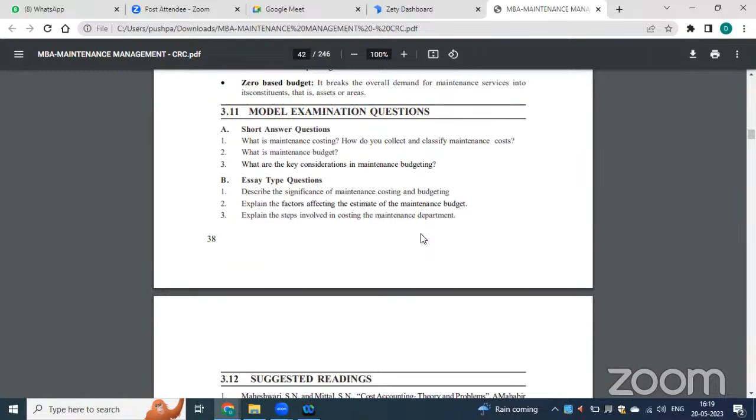Because in tough competition, if there is a delay in production, it definitely affects the cost of production, and companies cannot take the risk of losses. So they have always ensured that they go with planned maintenance, and have seen that corrective action has to be taken on an appropriate basis.

And it's not only corrective action, they always have to design the proactive scenarios. They have to understand the proactive scenarios, and ensure that there is no interruption in the production workflow.

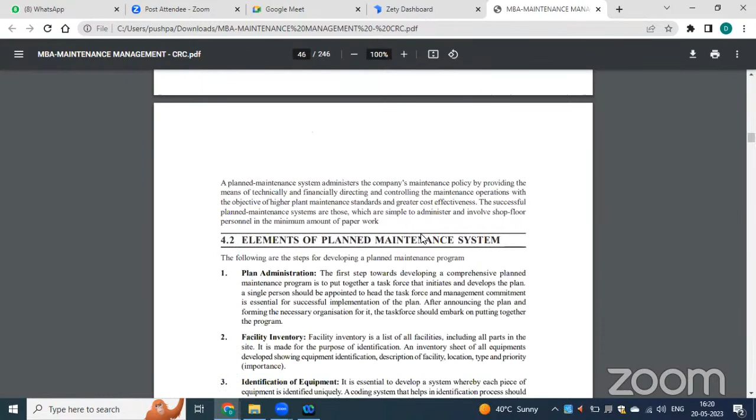So that's what we discussed in the last classes. We have seen the budget, and the estimate of the maintenance budget, wherein the estimate is based on the size of the asset.

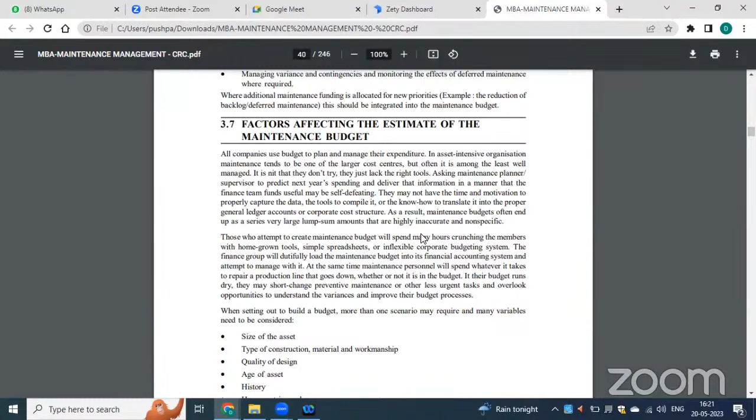Then there's the construction of the material, the quality of the design they are enrolling, the age of the asset, the history of the machinery, whether it is very obsolescent machinery or modern, modernized, automated technology, and how often it has to be investigated or maintained. All these factors are important for estimating the maintenance budget.

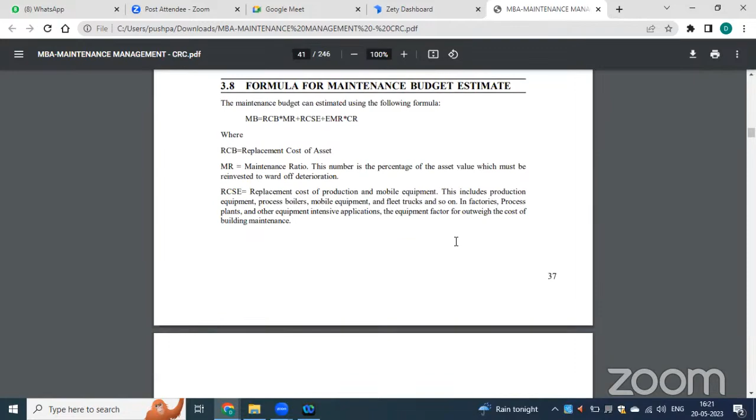So let us today talk about planned maintenance management system and control. We have seen till now the importance of maintenance management, the different costs involved in maintenance management, the role and responsibilities of a maintenance manager, and the importance of the maintenance management department. After knowing that, we will ensure how it works in the organization, how they design their activities from start to end.

So planned maintenance - how they have been planning these activities, and what are the different types of documents they prepare whenever they are planning this maintenance.

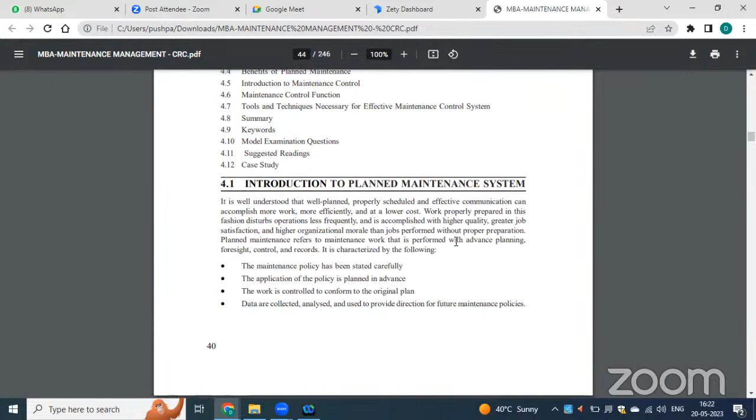It is always necessary, whenever we want to do appropriate tasks in a smoother way, that we go for a well-planned structure. When we are very clear and have a plan, we can execute it smoothly. It is well understood that well-planned, properly scheduled, and effective communication can accomplish more work more efficiently.

And at a lower cost, because we know what we are going to do and we can try to reduce the wastage whenever we have a pre-plan.

So the maintenance policy - what are the activities we try to understand in the plan? The maintenance policy has been stated carefully. We are establishing some policies, procedures, and goals of management. Whenever we are framing our maintenance management department, we have to ensure how the policy has been stated, and based on that we will plan.

So for every machinery or for every department, we have a policy. Whenever we ensure that there is a policy, it is necessary that we understand it carefully.

This should be stated very clearly. So what is the first characteristic? The maintenance policy has been stated carefully, and the application of the policy is planned in advance. This policy has to be clearly analyzed. Based on the environment we are working in, we generally state the policies, and the application of the policy is planned in advance.

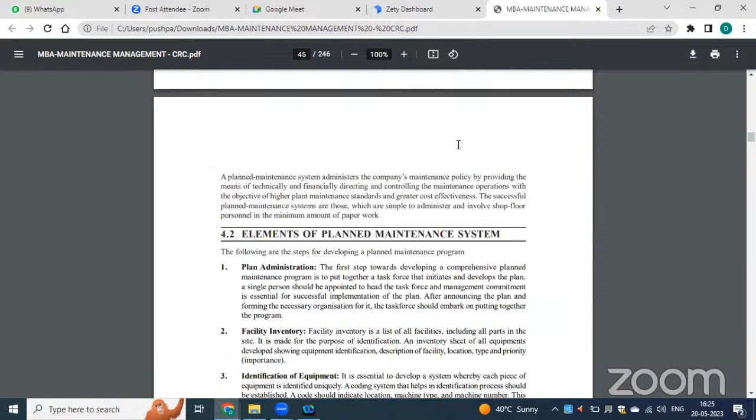A planned maintenance system administers the company's maintenance policy by providing the means of technically and financially directing and controlling the maintenance operations.

So here, what is planning? Who will do this? The administration department. This helps us administer the operations in a smoother way.

What are the elements of a planned maintenance system? The first element is plan administration. The first step towards developing a comprehensive planned maintenance program is to put together the task force. Who is required for planned maintenance? First of all, we require personnel - a task force, a group of people who initiate this maintenance program and develop the plan.

In this task force, a single person should be appointed to head it, and management commitment is essential for successful implementation of the plan. They may comprise people from each department, or specially appointed personnel with experience in different functions. Whoever is appointed should have managerial commitment for successful implementation of the plan. After announcing the plan, they have to ensure the task force embarks on putting together the program.

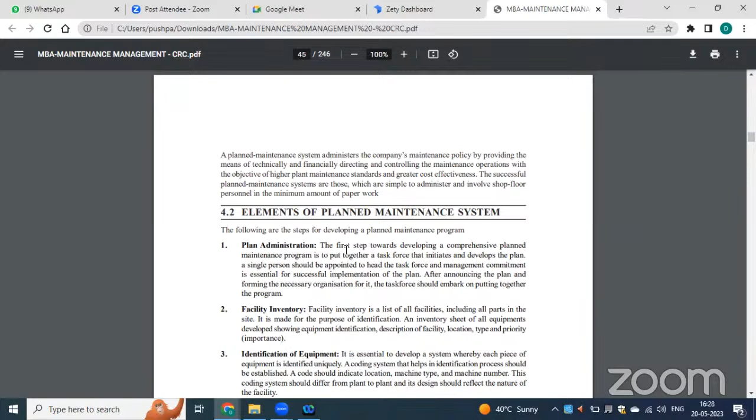Then identification of the equipment. Not every equipment needs continuous maintenance. We have to identify the equipment that is used more frequently, on a continuous basis - these require more focus on maintenance.

Machines that are not routinely maintained should be checked every 15 days or every month, to ensure there is no downtime for that particular machine. This involves identification of the equipment, where it is located, what role it plays, and how many spare parts are required for its maintenance. In this way, they collect the data.

For all this, they maintain a code. A coding system helps in the identification process and should be established. Whenever they maintain documentation, they provide a unique code for every equipment so that it can be easily identified.

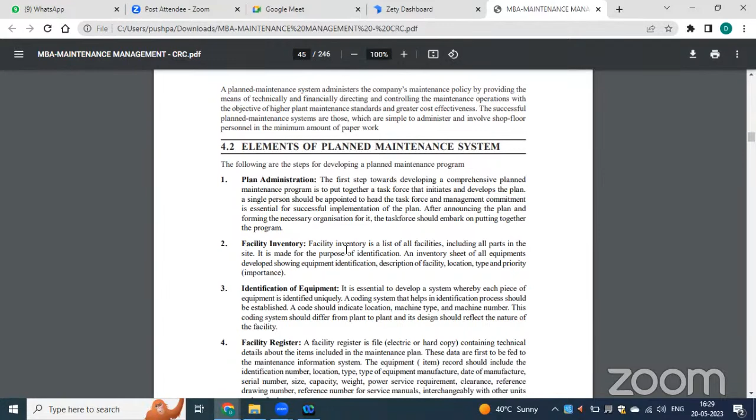Then they maintain a facility register. Every document has to be maintained in the form of books. A facility register may be in electronic form or printed form, nowadays, based on organizational policies, containing technical details of the items including the maintenance plan.

So they will have all the information where, whenever any external person goes and sees the register, they will come to know the inventory, the spare parts, or the way operations have to be organized or conducted.

The facility register gives information regarding the location of the equipment, the type of equipment, the manufacturer, the date of manufacture, serial number, size of the machinery, weight, capacity, and power service requirements, since every machinery has different power requirements - some 20 watts, some 100 watts, some 1,000 watts. Based on the requirement, they maintain this in the facility register.

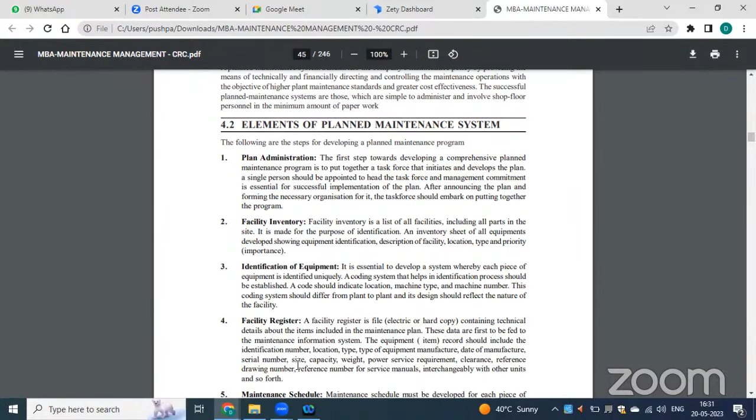Then the maintenance schedule - as we said, we have to plan for the program. For this, we organize a scheduler, and based on the schedule of each piece of equipment, the tasks are performed. The schedule will include the name, identification number of the equipment, the location reference number, and a detailed list of tasks to be carried out.

For every equipment, we see whether there is an inspection, preventive maintenance, or a replacement to be done, and specify the list of tasks to be carried out. Then the frequency of each task, at what intervals the tasks have to be carried out, and the trades required to carry out each task.

Sometimes the machinery is at different places, so what other requirements are needed to continue the task - the time for each task, special tools required, materials needed, and details of any contract maintenance arrangement. These are all included in the maintenance schedule.

Then job specification, wherein we see the procedure to be followed in every maintenance. Job specification will include the identification and number of the item, the location of the item, the maintenance schedule reference, the job specification reference number, the frequency of the job, and the reference drawings, manuals, and safety procedures to be followed.

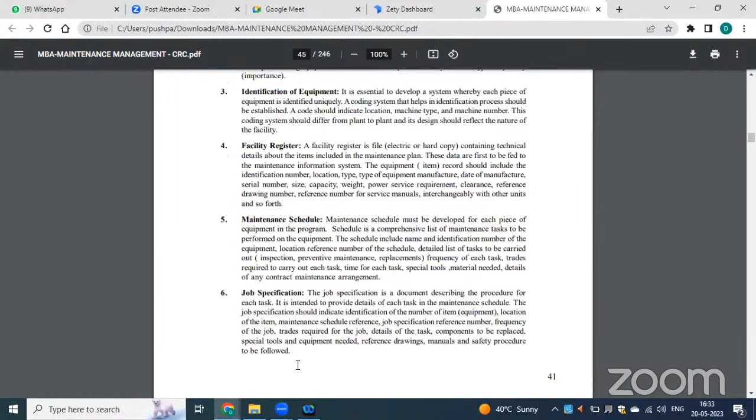So we have seen the planning activities so far. First, they identify and administer the activities. Then they list out the required inventory. Then they identify the equipment. After identifying the equipment, it is also necessary to maintain a facility register, design the maintenance schedule, and prepare the job specification.

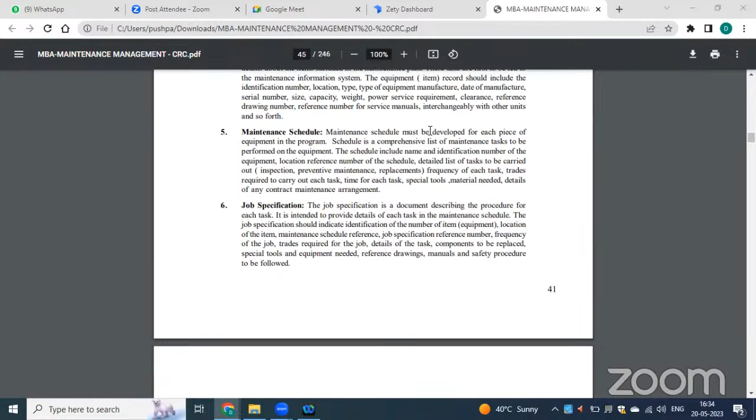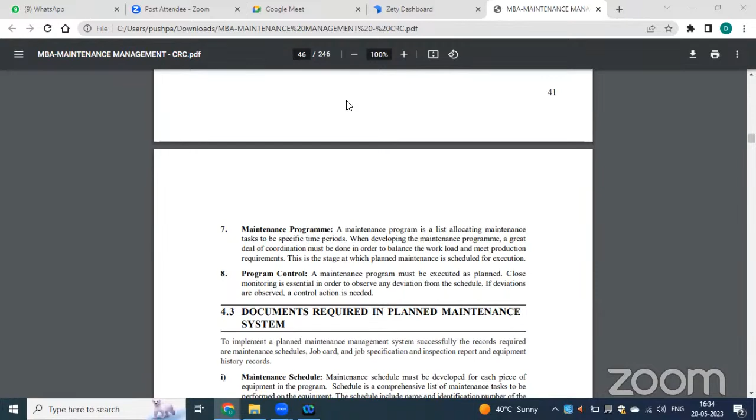Then how is the maintenance program planned for? It's a list allocating maintenance tasks tied to specific time periods. Then program control: we try to see how the plan is being executed, and through monitoring we check whether any deviations have occurred from the schedule. If any deviations occur, we go with the action plan that is needed.

Then what are the different types of requirements and documents that are required?

These are important questions that can be asked in your examination, because it shows how organizations practically do these activities. We should be very familiar with what type of books they maintain, and how they administer the plans and the activities.

Let us go through the list of documents required in the planned maintenance system. First, the maintenance schedule, which tells us the list of activities scheduled for each equipment in the program.

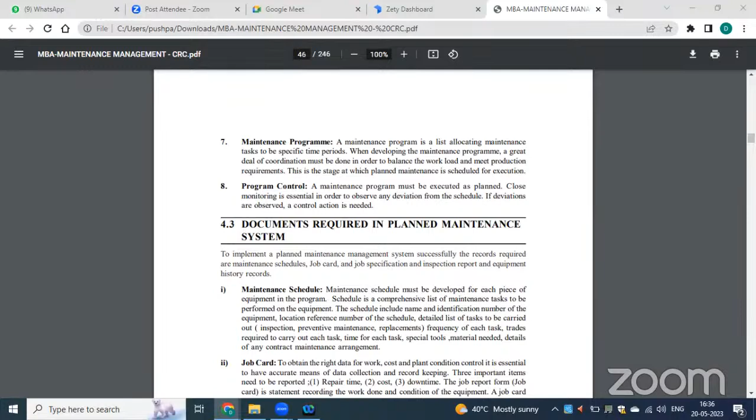Then we have the job card. What is a job card? It gives us the right data of work, providing an accurate means of data collection and record keeping. What is included in the job card? The repair time, meaning how much time is involved in the repairing, the cost involved, and the downtime.

What do you mean by downtime? It's the machinery breakdown time, how much time the machinery is not being utilized. That is considered downtime. Then the job report or statement records the work done and the condition of the equipment, showing how much work was done by that machinery and its current condition. These are all the items included in the job card.

A job card can be issued to each employee participating in a job. It can be a manual job card or an automated one. Most of the information required is to be extracted from the work order.

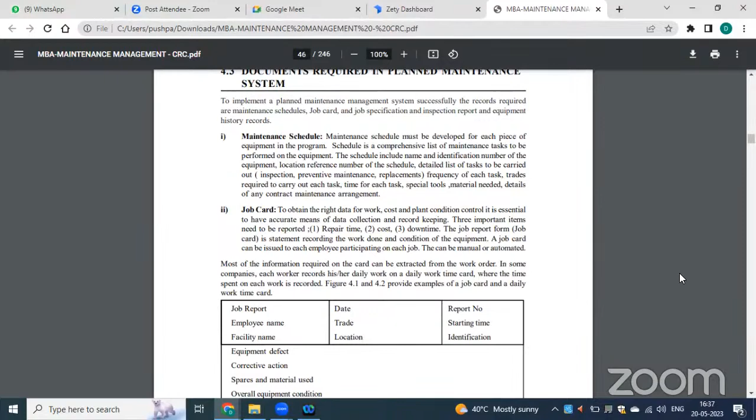We will have a format job report with the employee name, whoever is allocated for that job, the facility name—the department or floor level assigned—the date, the trade, the location of the equipment, the report number, and the starting time identification.

Then what type of activities are they doing on a continuous basis? Is it an equipment defect? Is it corrective action done this time? Have spares and materials been replaced? Is it the overall equipment condition, or remarks and time taken?

So this will be the format of any job card, which gives us complete information on what type of jobs they have been involved in.

Then we have the job specification. As I mentioned, job specification involves information regarding the inspection and tools used for that particular job, and how the maintenance activities have to be undertaken, so as to meet a required standard. Therefore it is necessary that all conditions be clearly mentioned so appropriate action can be taken.

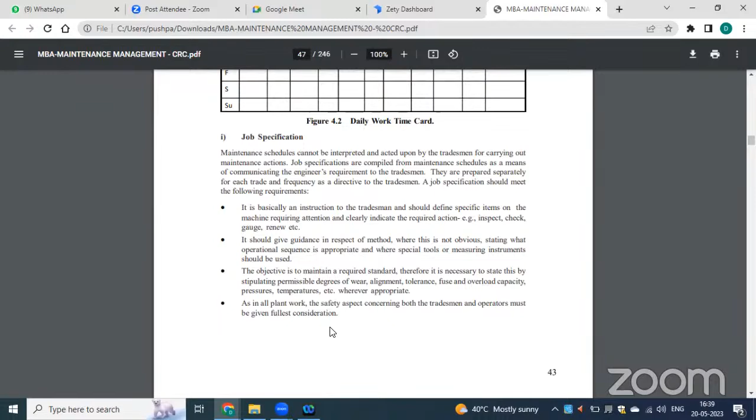The job specification includes the plant description, where the equipment is located, the week number on which they worked, the plant number, the maintenance code, special tools if required for doing the job, the operation number, and reports of other defects noticed during inspection. This is how the specific job specification format will be.

Right, so here, the first letter determines the trade: M is mechanical, E is electrical, C is civil. So they will try to code it. The specification numbers will be like M123, that is mechanical department, job number 123. Electrical department 125. In this way, they will try to give the codes based on the first letter of the denoting trade.

And weekly - meaning, is the maintenance department looking after this on a weekly basis, monthly basis, quarterly basis, or annual basis? So weekly means W, monthly means M, 3 monthly means 3M, that is quarterly, and A is annually.

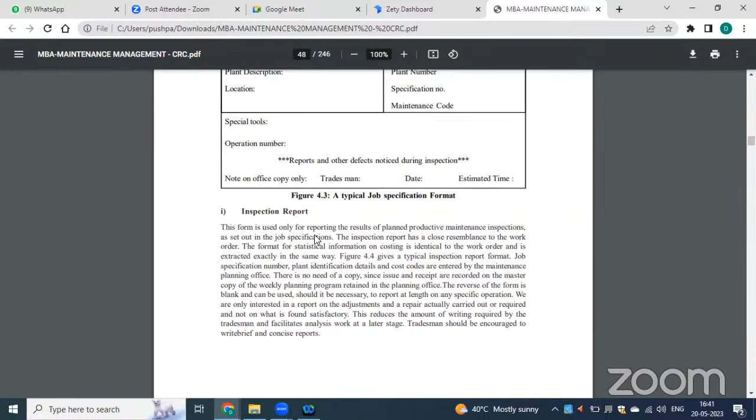So it's like an inspection report - a form used only for reporting the results of planned productive maintenance inspections as set out in the job specifications. Here we will have the operation number, the item, the date, time on, time off, total hours, hours in minutes. So in this way, they will try to maintain a typical inspection report format for all the planned activities.

Then equipment history records. As we have seen, history is very important - how many years the machinery is, how old the machinery is, what requirements it has, how many spare parts the machinery uses, how often the machinery is on, how often breakdown is affecting the production process. So everything will be recorded.

So equipment history records consist of equipment description and location, the inspections, repair, servicing, then work done on equipment, measurement of reading taken, failure time, and the time lost to carry out repairs.

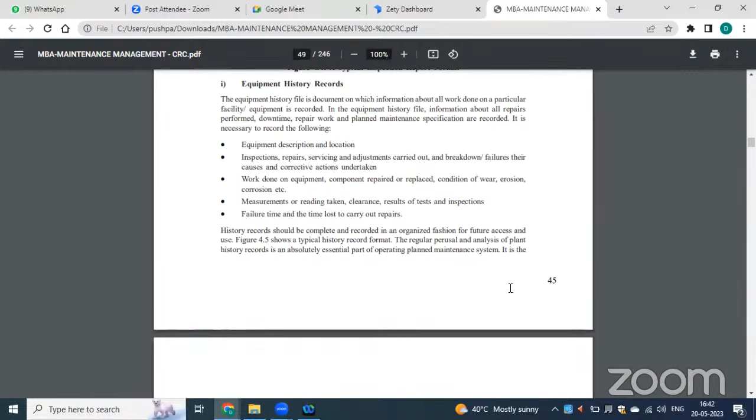So see what is the cause, what is the repair done, what was the downtime, what was the repair time. This will give us information that, okay, what machines will take a long hours of repairing time, what machines will take less hours of repairing time, what machines are having more breakdown time.

So based on that, we can plan our activities. This history provides a base showing on what continuous basis the machines are being maintained, or what the condition of the maintenance is. Based on that, we can take corrective actions, or we can take preventive actions. So the mechanical history record gives us an idea of the overall picture of the machinery, and based on that we can plan activities.

Benefits of planned maintenance - what is the benefit? Definitely, whenever everything is planned, we can reduce the risks, so there's a reduction in emergency maintenance. Whenever we know there may be a breakdown and we have taken corrective action, then there will be no breakdown. So we can reduce the number of breakdowns whenever we are planning pre-maintenance activities.

Reduction in downtime - when we have everything in action or arranged, we have spare parts managed, we know there may be a downtime, we know if the machinery breaks down we have to get the tools and equipment ready, we know the location of the machinery and its importance. All these factors will definitely reduce the downtime of the machinery when we go for pre-planned activities.

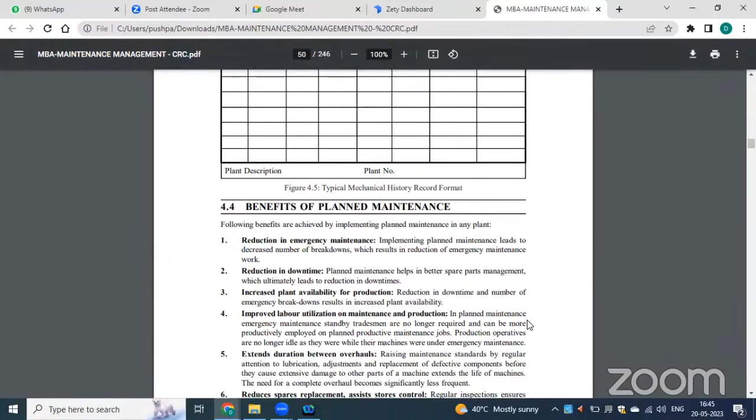Reduced spare parts replacement assists stores control. Regular inspections will try to ensure that spare parts are not being replaced or going on with excessive damage, and early inspections give a warning of impending component failure.

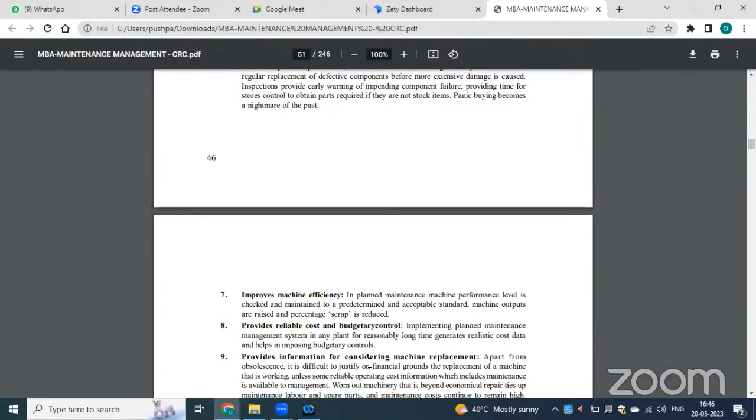Improved machine efficiency, wherein the performance level is checked and maintained to a predetermined and acceptable standard. This also provides information for considering machine replacement.

Whenever we go with the track record of any machinery, or with the data, we can understand the obsolescence involved in that particular machinery, and relate it with the financial grounds. We try to see whether the machinery has to go with buyback, or what policy has to be designed for that particular category of machines.

So this is how the activities are planned in the maintenance department.

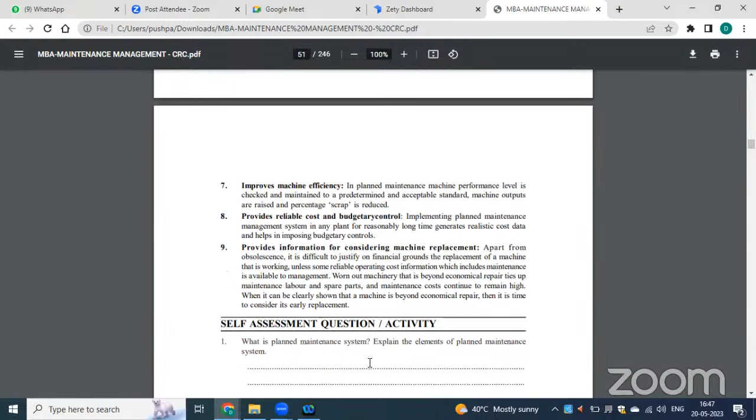So what is control? The deviations that occur from the original plan. Whenever we are planning, and based on that whenever the original actions have been undertaken, we'll try to see how much deviation there is, and based on that we'll try to go with maintenance control.

So variations in maintenance demand - whatever the input, whatever the output, whatever the objectives, and based on whatever the facilities, labor, equipment, space - how we have planned it, scheduled it, executed it, what type of machines and equipment were involved, how the performance of the machinery has been improved, and how the availability of machines, cost and quality are affected.

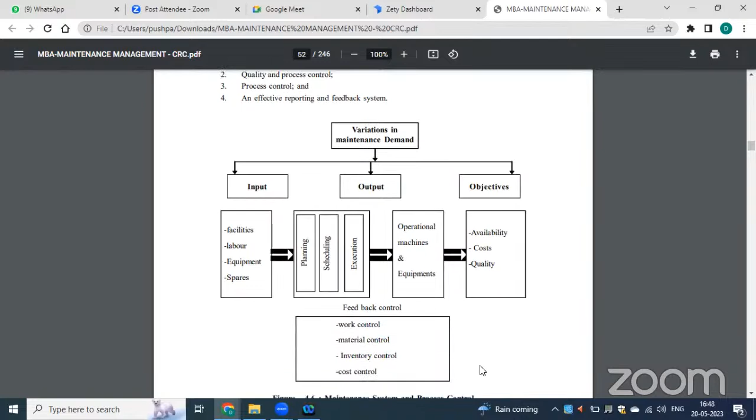Based on that, we will try to go with some feedback, and we will try to go with work control, material control, inventory control, and cost control. So: planning, organizing, implementing, and controlling.

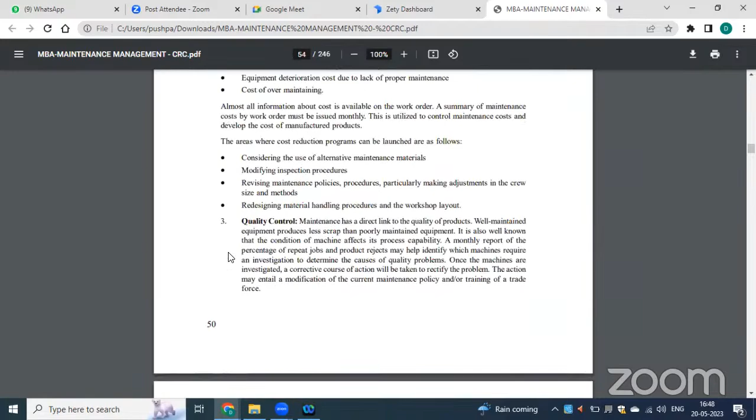So this is what is there in the maintenance plant activity.

This question is also very important, and this chapter is also very important because it gives us an idea of how exactly the maintenance management is coordinating with the activities, planning their activities, regulating their activities, ensuring that the performance of the activities is being measured, and after the performance of the activities, what are the corrective actions or what are the deviations that are there.

How these deviations have to be controlled from the financial perspective, from the organizational perspective, from the operations perspective, or from the quality perspective - these type of deviations will be analyzed, and based on that the companies can take the corrective action.

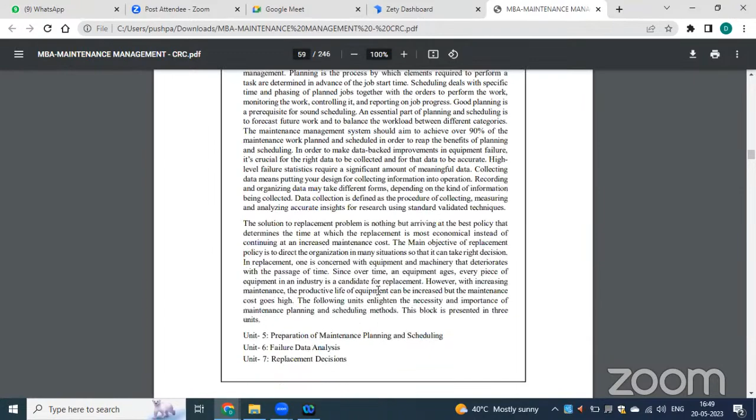So in the next class, we will try to see how the companies are scheduling, how they are doing their activities of scheduling, how they are forecasting the maintenance, on what basis the forecasting is done, and on what performance basis the maintenance department is regulating its activities.

In the last class we will try to come out with the points that have been important for maintenance planning and preparation of maintenance planning and scheduling. Before we try to plan and before we try to schedule, what are the important factors that also have to be ensured or kept into consideration for design of the maintenance plan.